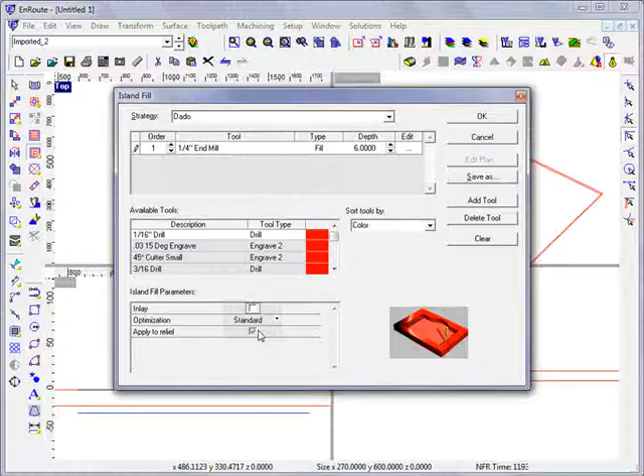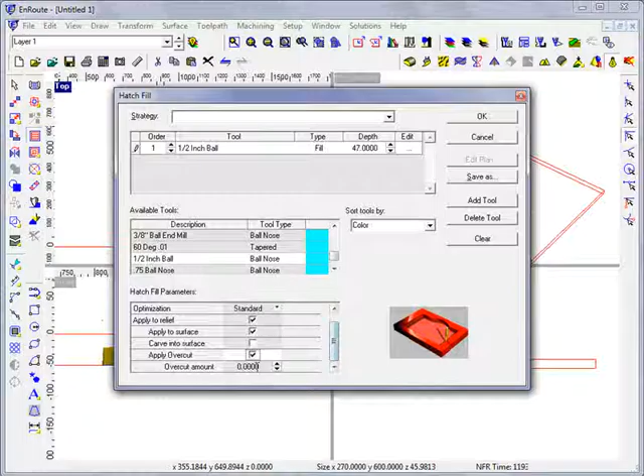Okay, Daniel, so what I have here is, I'm not sure what I did with this one. All right, I'm just going to delete all this for a second. So there's probably more than one way to do this. But one thing that comes out to me is if this is my part, I'm probably not going to try and pocket on an angle here for an inlay. That doesn't make a lot of sense because I think it would be difficult to achieve.

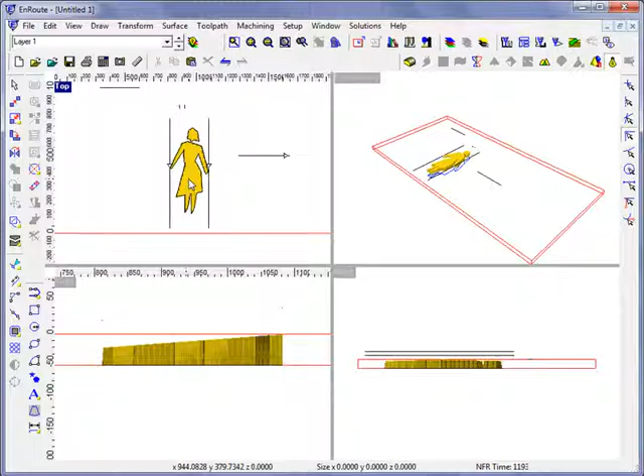So I'm going to plan on my pocketing being flat and let my surface itself be beveled. And whether you want to do that on the back or the front doesn't matter. If you want to have a nice polished edge, then just mirror it and put the edge on the back so that you're just cutting away the back portion, and then having this kind of be the part that pops up through.

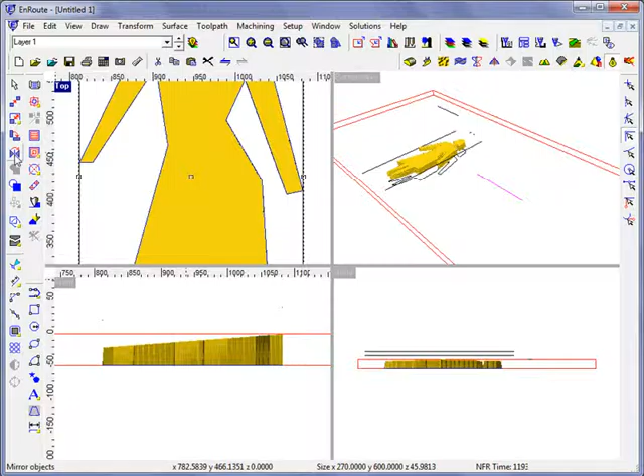But it just occurs to me when I'm doing the pocketing and the cutouts, I'm going to want them to be done with end mills and flat end mills to make sure they fit together. So that's to me the way to do this. So I took one of these characters here and I made it the size of the part we're talking about, which is about 600 tall by 270 wide. Okay, so that's one aspect here.

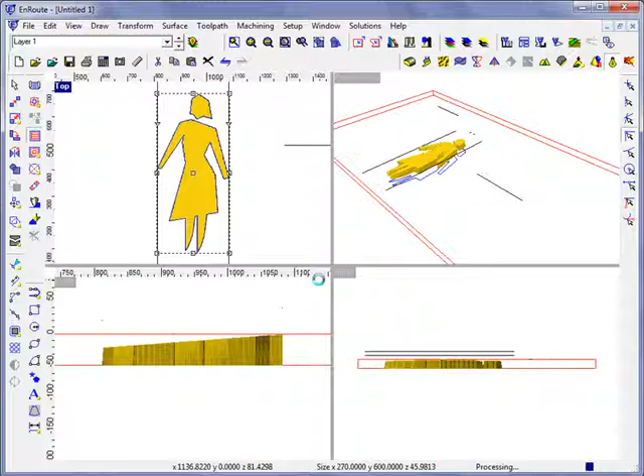Now I'm going to take these two and whatever thickness I want to have to them is what I'm going to put here. However much I'm going to pocket it down in here. So I'm putting 6 millimeters, a quarter inch would be my pocketing depth, and the rest of it's going to raise above that.

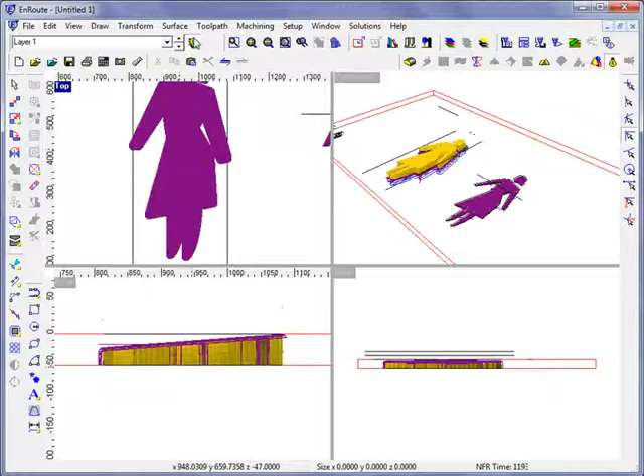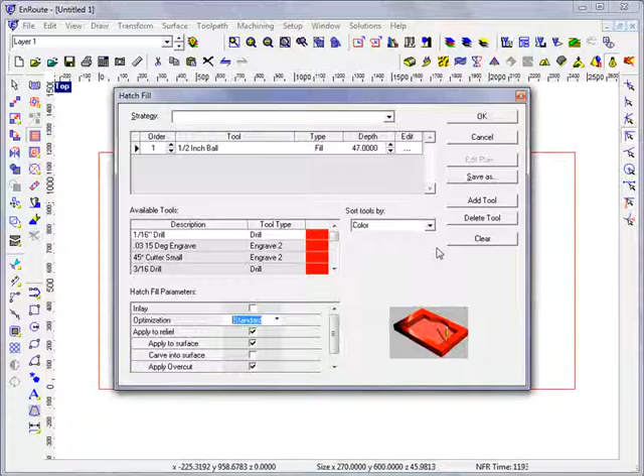Okay, so if I look here for a second, this is going to be, for this particular shape, 40 millimeters above zero, and this 20 as far as it's sticking out. So that's something I'm going to pay attention to. So what I'm going to do is I took my part and I'm going to make it 6 millimeters thick to start with. Now I'm going to put on a couple rails, one on each side of this figurine here, and this one.

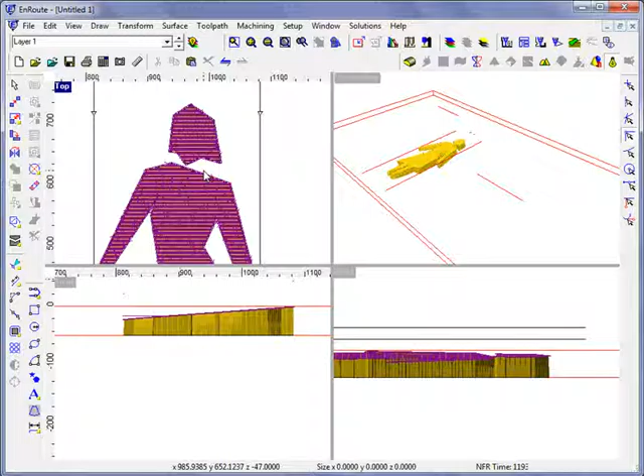I'm going to select my part here and this side, and then say move this rail over to this side. That's not what I wanted here. Over to this side. Need to group this for a minute. And now I have one on each side here. So this might change based upon some factors, and I'm going to actually come here and merge this. Let's just create a new one altogether.

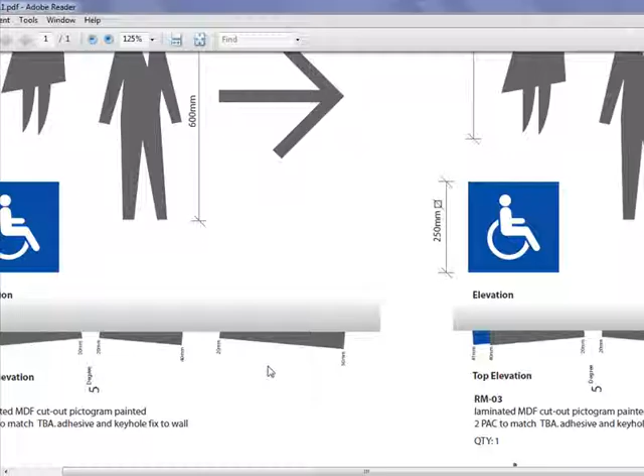And it's important when you're looking at rails to be aware of where they are. So I'm going to grab these two here. Now this one, I'm going to come to my front view, hit F2, and I'm going to move this one so it's 20 above 0, and then I'm going to come to this one and move this one so it's 40 millimeters above 0. So I have two lines here. One's going to be lower and one's going to be higher.

That's going to be my disparity, and I might alternate those. I'm not sure which one I want based upon whether I'm doing the front or the back, but that's going to give me the general idea. Then I'm going to take a straight line here, and I'm not going to rotate it. The rotating is going to happen by the 20 and the 40 across the length of this part.

So I should be able to come select this one, go to sweep two rails, select the first rail, select the second rail, and then 1, 2, and hit add this to my current relief, so I'll maintain that 0.6 backing, and there I'm going to have a surface that's pretty much going to be where I want.